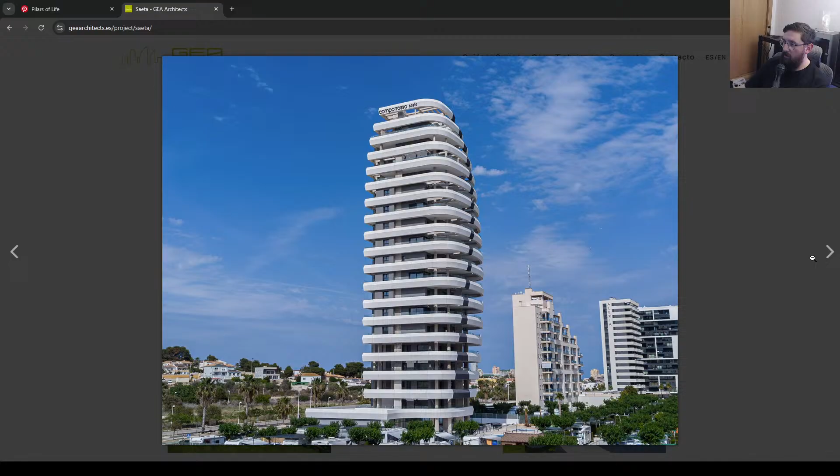So there's this firm I work for, right? This is the firm I work for. We recently did a few projects. We're finishing this one here. This is a project we called Saeta. These photos don't do it justice, but the logic behind this is quite parametric, although we didn't do it parametrically speaking. We did it via 3D modeling in Rhino.

So I actually have better images here, let me just open it up. I have it on my WhatsApp. This is on-site images. Yeah, a few pictures we took.

It's really nice, and I was thinking of grabbing this idea and taking it to Grasshopper and seeing how we can evolve it a little bit more, or play around with it. Oh, these are other buildings we're doing right now. We finished this tower here and we're doing the next one here, just out of curiosity. These two are also ours.

Anyway, yeah, I was thinking of taking this design and seeing how we can play around with it a little bit more. Let me just put it in my WhatsApp, don't want to expose much. You can see here it's done with GRC material, and there's this figure in the middle which is black instead of white, just to contrast and make it a little bit more interesting.

So yeah, I was thinking of grabbing this concept, and then instead of doing it with a square base with a fillet, perhaps doing it with a polygon or a circular sort of floor plan, and then playing around with the scale.

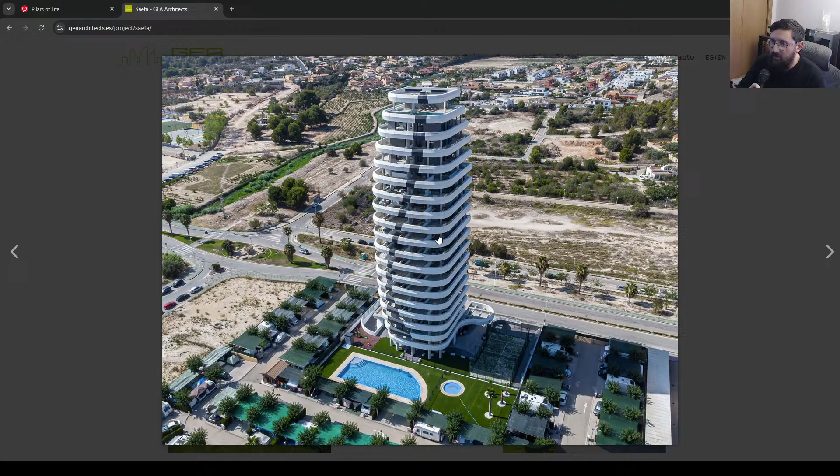So yeah, this is the firm I work at. My job is to design these buildings along with my team, the team I work with. We have a lot of projects actually, a year we probably handle around 60 to 70.

Oh, this one's beautiful as well, I really like this one. This was a competition we won, beautiful design. This is being constructed now, so these are just renders. Yeah, beautiful, we do a lot of projects, a lot, perhaps one a week, more or less.

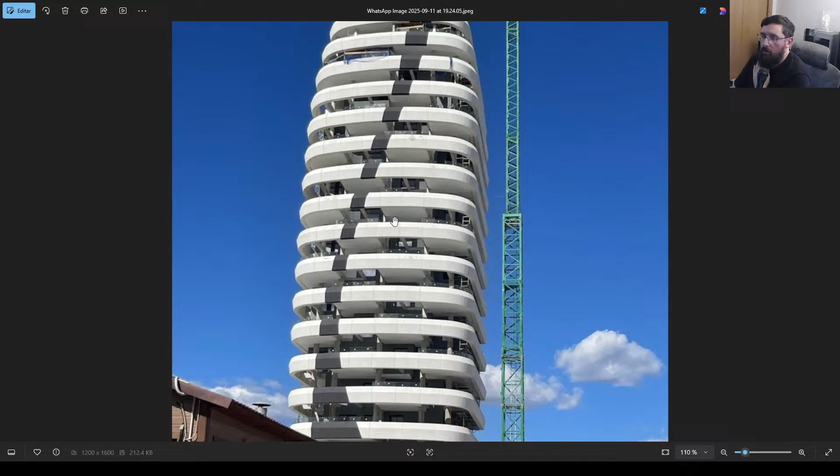Yeah, just a crazy amount. Anyway, so that was an idea I have, and then there's this as well. I know this looks super attractive, but I'm not a huge fan. I'm thinking of just doing the Saeta project, this one here. You can see here the terraces are like one yes, one no, one yes, one no, and that's because if you build a terrace on top of another, that counts as constructible surface, and then you have a limit of constructible surface per plot.

So doing it like this, it doesn't technically count because you have two heights instead of one, so this doesn't count as an overlapping surface. So it's kind of a trick to save or have more meters squared designated to the housing unit in the middle. So here there's two units, one on the left, one on the right, and then each one has a terrace. So it's going one yes, one no, yes, no, yes, no. And then we kind of worked it out that way.

Ingenious solutions, right? Design is important, even for constructive design. Anyway, so I'm thinking of doing that. Now, if there's no opposition to this idea, we can get into it and see how we can approach it. Again, we're not going to do exactly this, it would be a little bit different. But yeah, that's the idea.

So yeah, that was a little insight as to what we do in our office on a daily basis. I'm part of the design team, so that's fun. Okay, so let's work it out.

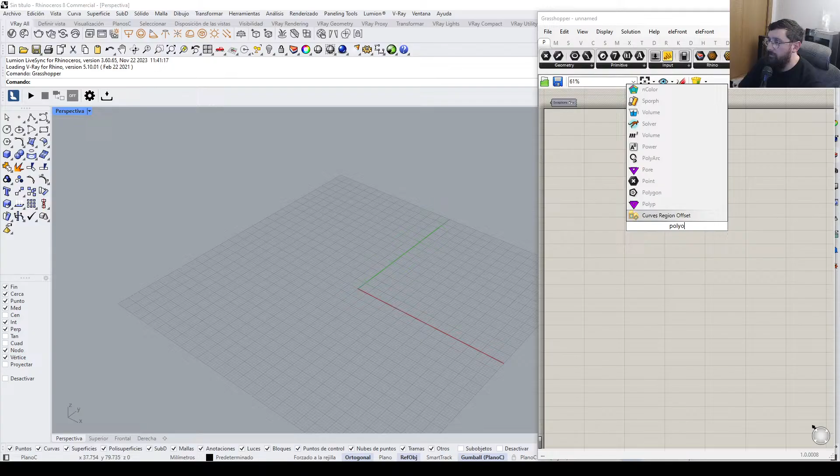I'm going to start off with a square. Let me just make some more space. XY plane.

Radius between 0 and 15, I'm going to start off with 10 maybe. Segments, I'm going to start off with a square base for now, so 4 sides. Oh, I just did something. There we go.

Here we're going to go for construct point, where are you? Here. I'm going to use a series for Z because I want multiple polygons along the Z axis. The height difference is going to be the height of a slab between slabs. I'm going to say 3.3, more or less. I think this project was 3.2 if I'm not wrong, just as a quick note.

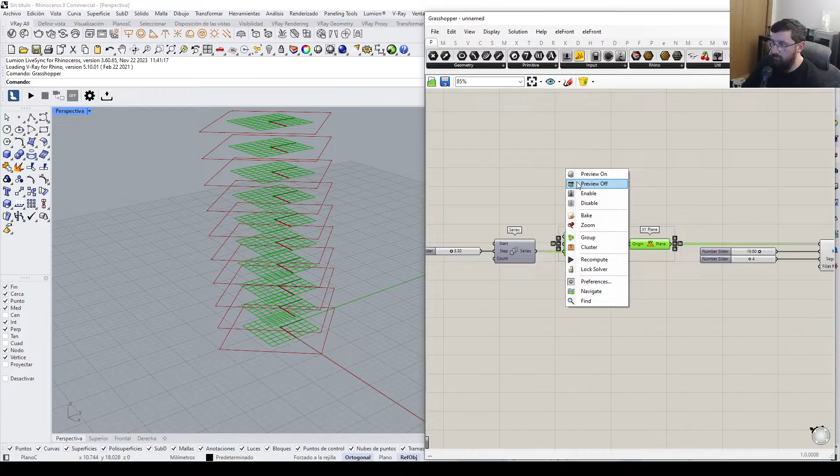Here on count, I'm going to go for... oh, I shouldn't have done decimals. Between 0 and 30, here I'm going to say 20. I think this one had 22 floors. No, I might be exaggerating, 1, 2, 3, 4, 5, 6, 7, 8, 9, 10. Yeah, about 15, 16 floors.

So this is the square. You know what, I think a circular one will probably be better. Okay, let's fillet it, I think it's going to be better.

So fillet radius, if I do maximum fillet it's gonna... oh, why is it not interpreting as a curve? What's happening here then? Parameter failed to collect data. Okay, so I'm using the wrong fillet, basically. That's not it again, it's this one here. There we go.

Okay, so here I'm using a fillet of 1. Okay, I'm gonna do here. Okay, so how can we achieve some sort of design in between? Doesn't necessarily have to be this, it could be something else.

So what I'm thinking is using evaluate curve. Does that make sense? Where I can extract a point on the curve. The only thing is, I need... actually no, before we do this, we need to create that belly, right?

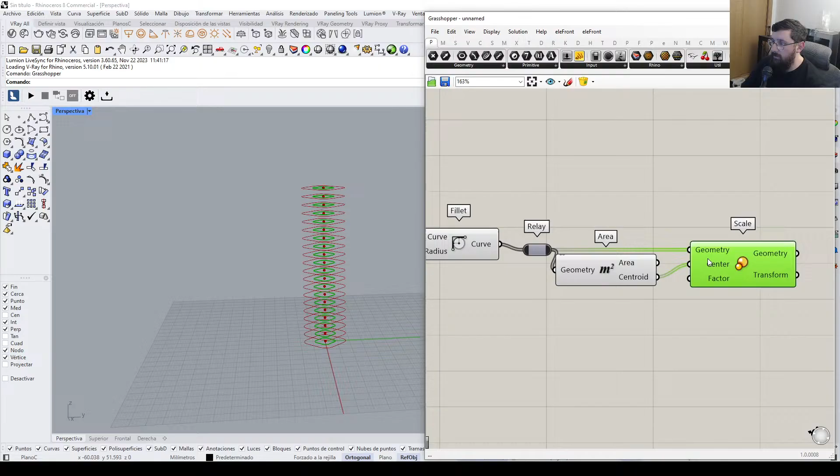So I'm going to scale each one from its center, and the factor is going to be according to a graph. I think it's just easier, graph mapper. The range is going to be the amount of copies of the fillet here.

Something's happening over here, the scale, I don't want to see that yet. The steps is going to be the same as the count minus 1, so x - 1. I don't want it to be variables, I want it to be the algebraic form of x. That's going to be my steps.

The graph is going to be like a belly, so I'm just going to go for a sine belly like this, and then here I'm going to use a remap. Bang. Like so, do bish bash bosh.

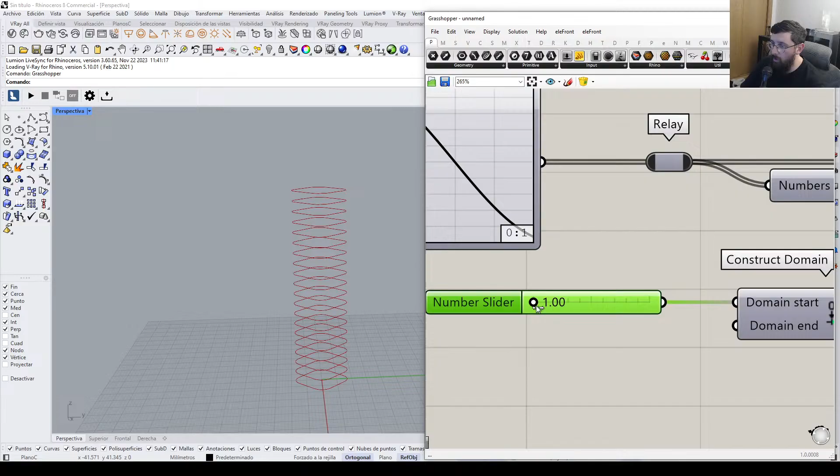Where do I want my domain to be from? Construct domain, between 1 and 2, because you don't want it to be too much bigger than it already is. So I want the domain to be quite close. 1 is exactly the same size, and then 2 is 1.5, it's pretty big. We'll just have to see how it works.

Factor, turn this back on and turn off the original ones. You can see we have something like that. So I think it's quite a lot, you want it to be somewhat subtle, and we have something like that. I think, okay, we can play around with these values later, I guess. So right now it's not a great, super complicated script.

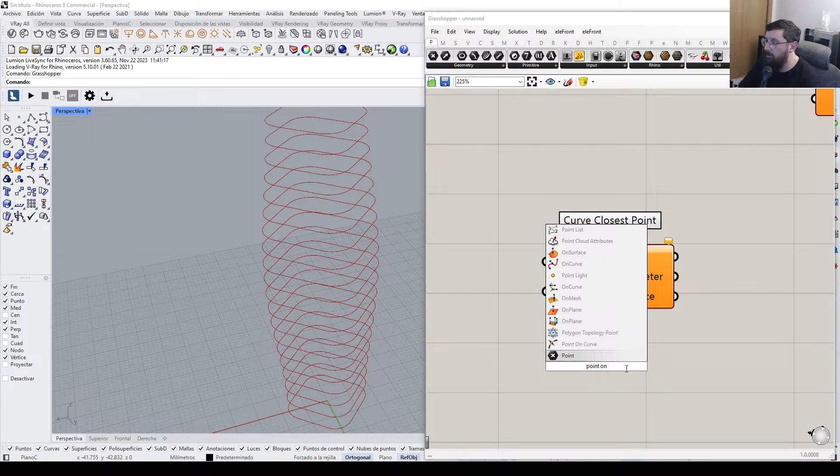What's that component? Curve is... it might be curve closest point. No, points on curve. Oh, you're joking. I knew this would happen.

So I actually searched, because I kind of reflect a lot on how to do things before I do it, so I have some sort of idea as to how to do it. Shit, I don't remember how to do it. I can pull this parameter. No, it's not that. Okay, basically I need a point to generate a point on the curve according to its percentage.

I don't know, I'm going to search here quickly on Google. Okay, I don't know, curve... I know there's a point on curve or something. Point. Bloody hell, what's the component? Is it? It might just be evaluate curve, where the parameter is the number.

Wait, in theory, could it be that the parameter is just a value between here? Because I've reparameterized, the parameter is now between 0 and 1. Is that the logic? Yes, I think it is.

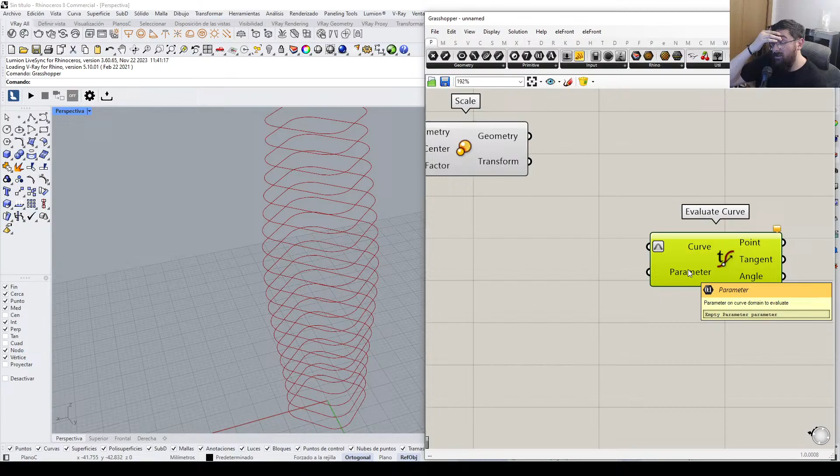So I think in theory what I can do is I can just copy this here. And instead of my parameter going between 1 and 1.3, I can say my minimum is going to be 0, and this is going to be 1. And I think 1 is going to be too big.

We'll see in a second. Yes, there we go, you can see it here. It's wrapping around the building, but I don't want it to wrap all the way around.

Oh shoot, is it stuck? Oh, I think it's because my minimum is 0. Okay.

So if I go here, my starting point is this corner here. Perhaps I don't want it to be on that corner, I want it here more or less. There we go, so you can see we kind of follow that curvature there. So that's going to be our end point actually.

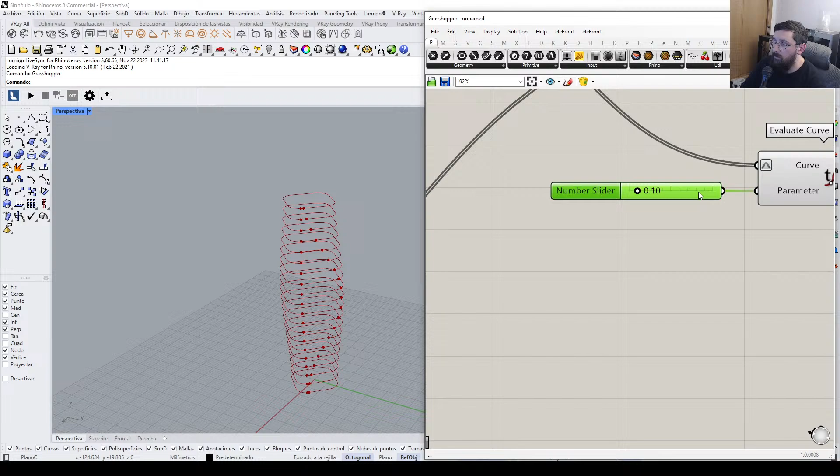And then we need to generate another one. Well, I'm just going to copy and paste this actually, and the parameter here is going to be like a starting point of 0.1. So you can see here it's quite close to one another.

So I'm just going to quickly change this to 0.3 perhaps. No, that's too much, 0.2. That's still too much, 0.15. And I think that's okay. And the maximum here is going to be 0.25. We want it to be somewhat slim.

And then use shatter. Exactly, that's exactly what I had in mind. Nice, I can feel like you guys are understanding the vibe.

So I guess here I would have to use a merge, and then here shatter. These are right, I have to use the parameter. Shoot, how can I generate the parameter?

You're joking. I can use a parameter... I can use a curve closest point, that's going to generate the parameter for me. So if I connect the point here, the curve which we already have from before, which is this, then we have the parameter. Again, I'm just going to copy and paste this.

Bang. Curve here, and then merge. Parameter, shatter. In theory, I'm hoping this works.

And the curve is what? I can just use the same one. I can just do this. Bang, bring this up.

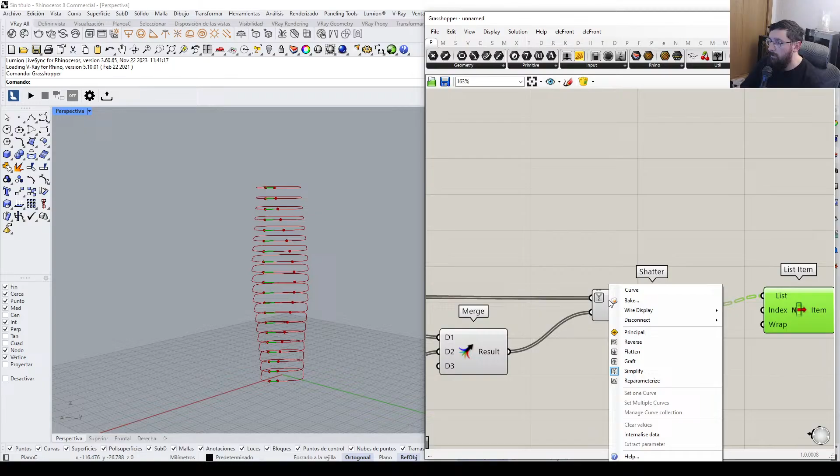Graft. Maybe the merge isn't working properly. There we go.

You can see we now select the first and the second. So I'm just going to quickly copy paste this panel, and the other one is going to be here. So I can select either one like so, right? So we have something like this.

I'm thinking perhaps I should probably clean this up a little bit. Bring this over here, this I can just connect to here. Let's try and be neat. I always say the same and then end up doing complete spaghetti.

Okay, alright, we have something like this. I have both curves, the one in the inside, which is currently highlighted in green, and the exterior.

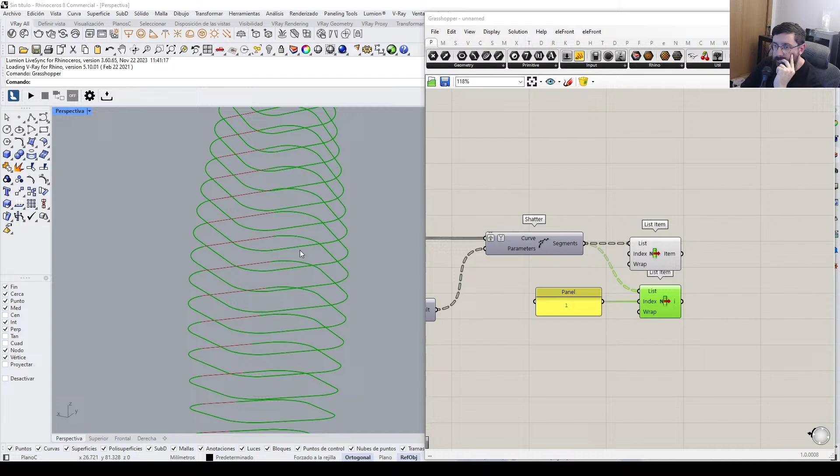Okay, so we want it to have some sort of balcony offset thing going on, right? So how can we do this? Do you want it to have the same effect as before? It might be a good idea to do so.

So first thing I'm going to do is I'm going to kind of design what the floor plan is going to be, just generically speaking. Offset curve, I'm going to go inwards. Balcony is going to be, let's say, 3. That's going to be my curve, it's going to be something like that.

And then perhaps instead of going here, I can do it here, and then I can just do a fillet with a different value.

There we go. A bit less, perhaps just 2 or even 1.5.

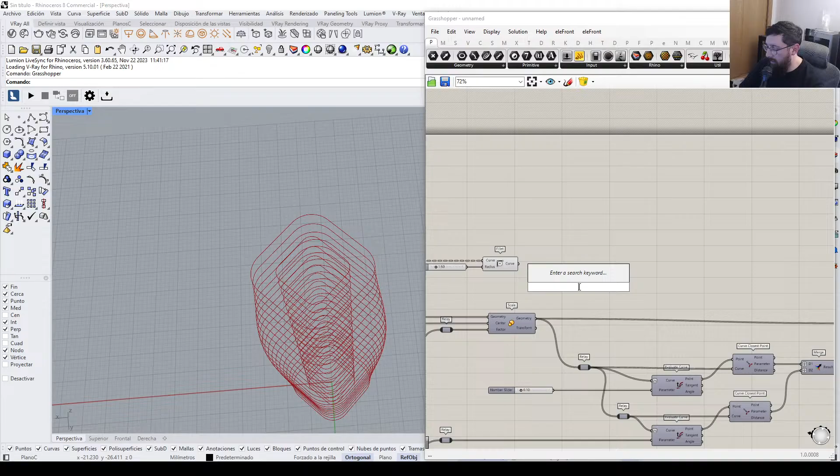And then here, what should we do here? This is the scaled one, right? So probably best if I put this next to my scaled version. And then here, a solid difference between the big one and the small one.

Oh okay, I need to graft and save my document. Give me a sec. Saving document. Okay, saved. There we have our balconies.

And then we wanted to achieve that kind of crisscross. The thing is, I'm not certain it's going to work 100%, but it's worth a try at least. So what I'm going to do, this has 4 sides, I can divide by 1, 2, 3 per side.

Thing is, I can define the polygon here. Expression x times 2. I need to double check this in a second, but I feel like this makes sense. If not, I can change it afterwards. X times 2 here, this curve here.

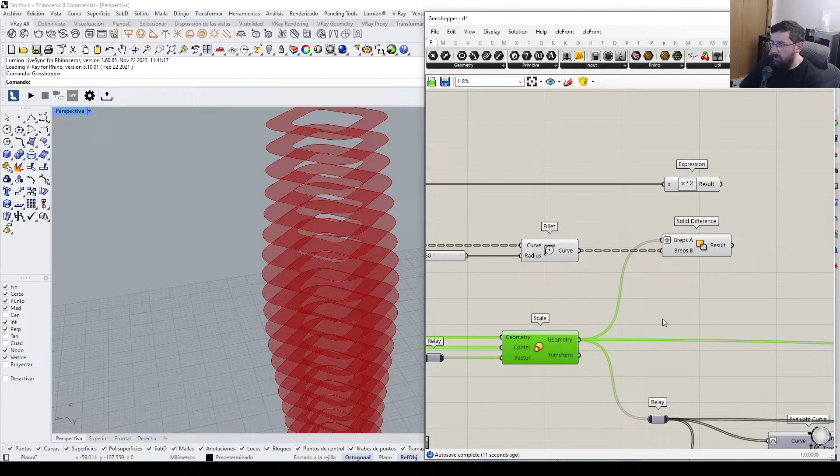Now I need the other one, which is this one here. I can divide curve, count, curve. Ah, shoot. It's not considering them all as a joined curve. Why? Why? Here it is, here it is not. Or is it? Oh, it is, because it's curved, so it doesn't give you that sense.

Okay, so here I guess I can go for 3. And then we can check. Yes, okay, 2, 3. Thing is, the third one here doesn't make much sense. I'm not sure how we did it here. We did the whole corner, that's why. Here it's a little bit different because we want it to be on polygons.

Different approach, I guess. I'm not sure if this part's going to work, to be honest. I'm not too confident. From here to here, we get all of these. Okay, good.

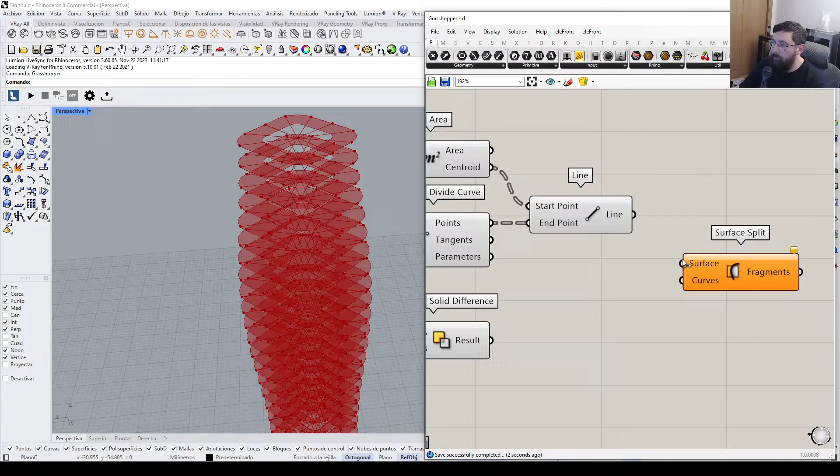Then surface split, where I'm going to be grafting. I should save this by this. I should probably graft. No, graft is not going to work. I think this works, let me check. Let me bake. Yes, okay, so that does work.

Okay, good. What happens if I dispatch? Because I have multiplied by 3 and it has multiple sides, it's an even number, so I think it should be okay. Bang. And then if I turn this off, we get that.

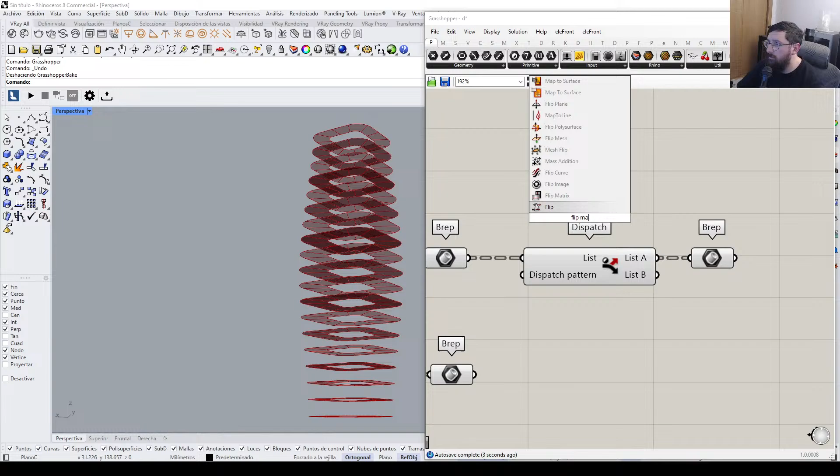Okay, so what I'm thinking is I should probably flip matrix. Bang, yes. So here I have to do like a double dispatch, I think, where I have this, and then another dispatch without flipping. I think I might have to flip because I have to revert the flip, I think. Yeah, I think I have to revert it. Okay, let me check. Bang. Yes.

Okay, that's going to be this one. And then this one here. Turn this off, and instead of here, it goes here. So you now get that zigzag where the thing I explained earlier works.

Right, so for those who've just arrived, we were talking about this building. When we designed this building in the office, we do this a lot actually. This happens a lot in Spain, because on the plot where we build, you can't build on 100% of the floor, and you want to go high up. You basically want to conserve how many meters squared you can build. So that's why it's usually thinner, because then you can go higher, and the higher the apartment, the more you can sell it for, and a high rise is much more attractive than a lower building.

What happens is you get a certain amount of meter squared usage you're allowed to build, and if you have a balcony directly on top of another, like from here to here, that counts as buildable meter squared, so you're consuming your meter squared for a terrace. Whereas if you have it at double height, it doesn't compute. So what you do is have it at double height, but you're always kind of doing this zigzag, so it doesn't compute, but you're kind of being clever, using that disadvantage of meters squared to design your building in a different way. So here it's very attractive that you have this double height, but it's not an attractive motive as to why we designed it like this, but rather a technical way around the buildability of the meters squared, if that makes sense.

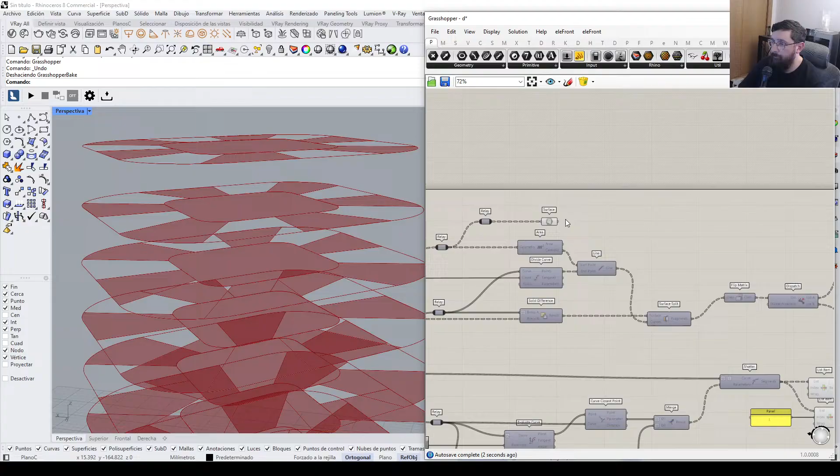So that's sort of what I'm looking for here in this part. So we have that kind of terrace going on here, and then where are you? I'm looking for the inward one, which I'm just going to convert into a surface like so, and then we can drag this over here, and that's going to be sort of the buildable space.

No, it's going to look better. Okay, so we have that floor plan. I'm just going to reduce it a little bit, actually. 12, there we go. We have that floor plan like so. What I'm going to do is define the building and the interior first.

I'm going to extract the surface. No, not the surface, the curve. I'm going to save.

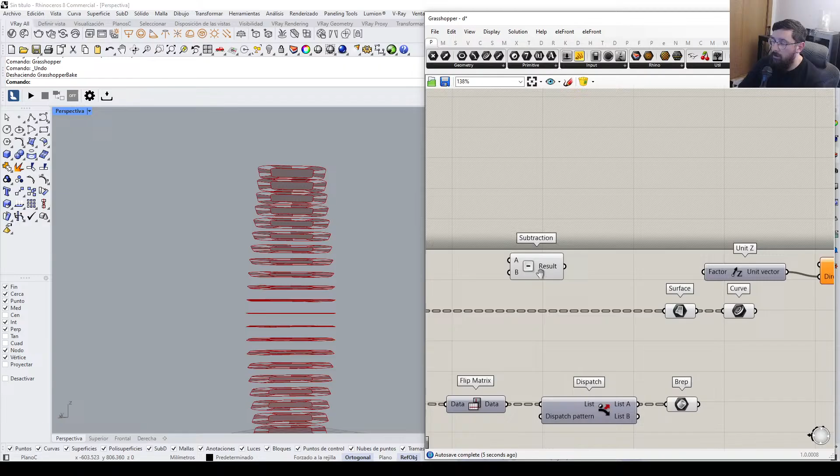I'm going to extrude. Now the height of the extrusion is going to be the subtraction of the height of the building by the thickness of the slab. So I'm going to say the slab has a thickness of 30 centimeters, and the height difference is something we defined at the beginning with this value here, height between slabs. So this is something we need to consider over here.

Yeah, okay, I'm just quickly going to relay this over here. This is Z here, this goes here. Actually, it should probably connect to the surface. No, not the surface, because you want the extrusion to be a surface, not a solid. Okay, you can see it's a surface, polysurface to be more precise.

And I guess we can just panel this. Normal panel, where is it? Square? Rectangle? Is it called rectangle panel? No, square panel? Ah, quad panel, Jesus.

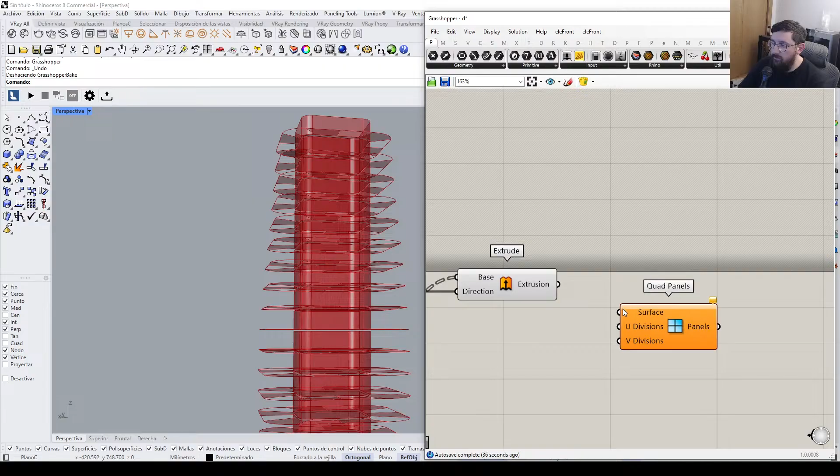I want one of the sides to be 1 and the other one going to be whatever. Now we can be super technical about it in a minute.

I'm going to deconstruct brep. I should probably calculate the length. So if I calculate the length of the edges, I can say expression, the length divided by whatever size I want the frame to be. So I'm going to say I want the frame to be 2 meters, and it's going to be x divided by y. That's going to be the division in one of these directions, which I'm not sure which one it is, but we will definitely find out in a second.

Faces, there we go. Turn this off. Let me move all of this down. Let me turn this off.

Okay, so I have the one in the correct direction, whereas this one is flipped. That's annoying. Let me just quickly sort this out. Like so, I don't need this. Okay, yeah, it's not an issue. I'm not going to be too bothered about this.

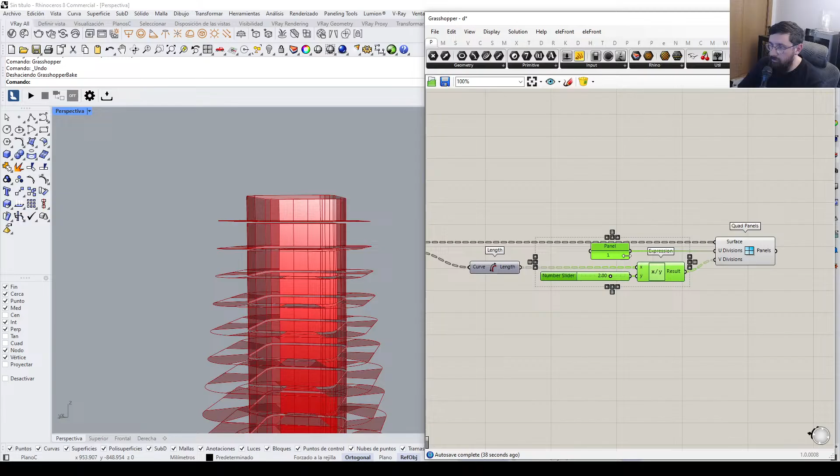I'm going to go for a frame. Actually, no, evaluate surface, area. Bang, bang, bang, turn this off.

Frame, I'm going to offset curve, negative, frame, oh wrong one, plane here, negative, I'm going to say 0.05, turn this here, hopefully it doesn't explode.

I should probably graft, I feel like there's a grafting issue here. Let me just double check. Here. Yes, I have duplicates for some reason. Okay, let me turn this off. Make sure this is grafted. Simplified and simplified.

Oh, this is a reparameterize, I don't know why I did that. Simplify, I'm going to simplify here as well just to make sure, and enable. And in theory, bake this.

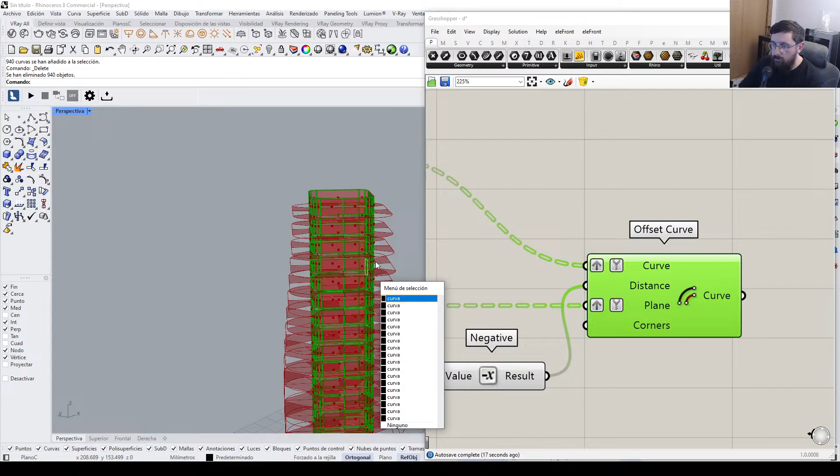Oh, that's not bueno. That's not bueno at all. What's happened here then? Panels, chord, no. I'm offsetting it inwards, it should work. Frame.

Is it because something's happening here? I might be duplicating surfaces. Yeah, okay, that's the issue.

Okay, let me turn this off. Graft, simplify, turn this back on. And I should have it sorted. Yes, now it's all nice.

Okay, so here now I have this good. It's all offsetting inwards good. And then I can do a solid difference between, let me just graft and flatten, graft and simplify rather.

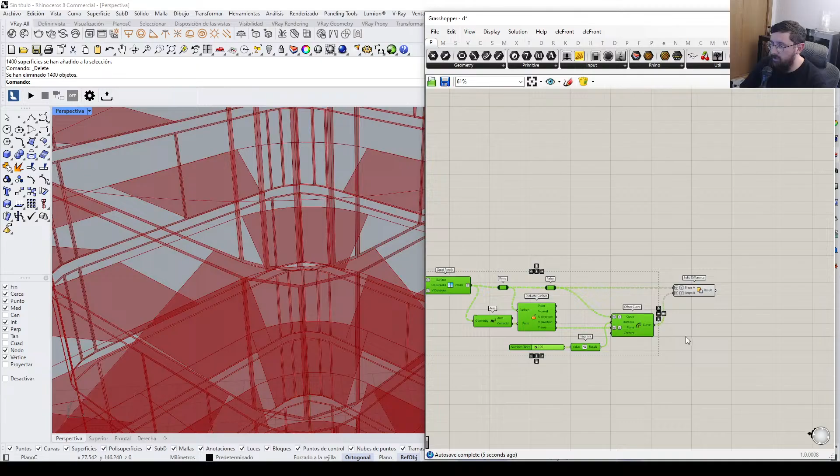Simplify, let's do that here. Bring this over here. Ah, okay, it did work. Okay, I thought I did it the wrong way around. Surface. So I have the frame and the windows.

I'm just going to change the color so I can preview it a little bit better. This is going to be the frame. Frame is this. Here, let me copy and paste. This is going to be my window. So this is going to be blue or green, whatever.

Okay, that's going to be my window, that's my frame. And the distance is pretty big, so I'm going to go for 1.2.

Going to take a second to load. Evidently, I'm creating more polygons. Oh, I don't like this. What's happening here then?

Extrusion, graft. Is it because it's considering I have more edges than faces? Is that what's happening?

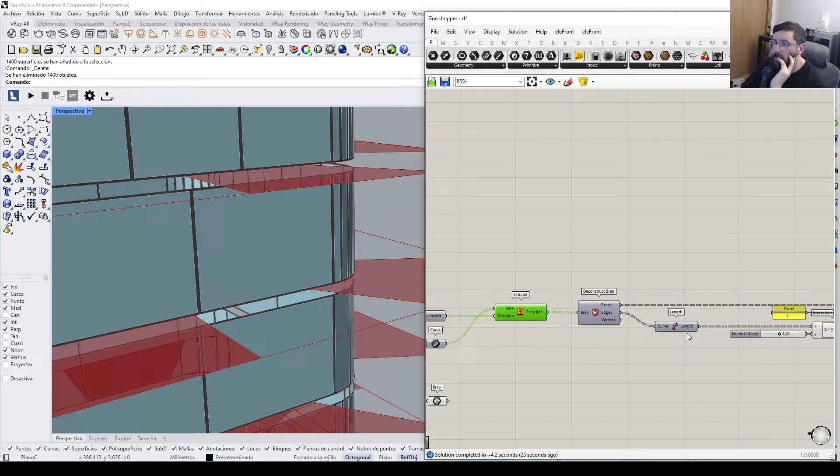There is a way you can test this. I can just do this. Face, edges. Maybe, we'll find out. Oh, it's overthinking. Damn.

Uh-oh. Not looking good. Not looking good. Oh. Not looking good. Load. Ooh, that was risky. That was very risky. Is it because I'm extruding a ton of loads of things here?

Here I'm extruding by this value. No, it's a fixed value. I don't know. Faces. Okay, let me just double check something. List item. No, list length.

Of this flatten panel, 600, 200. Yes, it is as I thought. Okay, so extrusion, I mean, this should be 600 as well. And it's not working. Why?

Is it because I get a lot of values here? 600. They should match. Why does it not calculate properly? Is it because I get an invalid value here?

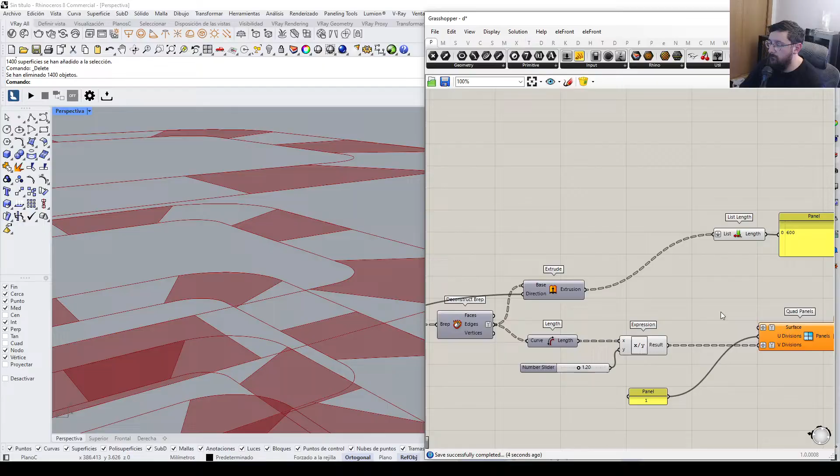It should work. I'm confused. Should I try it one more time? Just see. Yeah, I think I should, because I'm not sure why it's not working.

Actually, I'm going to reduce the number of heights I have. I'm going to make it really small, just to favor the calculations a little bit more. Suspicious. Now it works, okay.

This doesn't work. Curve offset failed. Is it because it's not planar? Yeah, I thought so. Okay, there is a workaround around this, and I think it's going to be a little bit easier, to be quite frank.

So the way to do it would be to shatter. No, not shatter, sorry, divide curve by this amount. Flatten, simplify, simplify. I'm kind of getting into secondary stuff here, but I think it might be useful.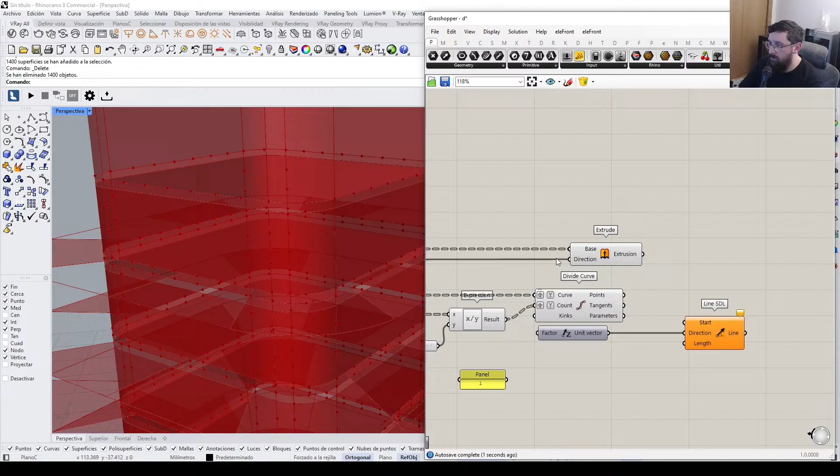And then here I can do SDL, Z, the extrusion value, starting point, and then surface split. Actually, no, that's silly, I can do a much better thing.

Polyline, close, yes indeed. Wait a second, what's happening here? Edge. What's happening? Wait, I'm going to do this part again because it's just not fun.

Okay, so the idea is to divide curve, divide length, I think is going to be more appropriate. Divide length, distance is going to be whatever, I'm going to say 2 for now. I do want it to round up, so I'm going to round up.

This is my curve, there we have the distances. Then SDL direction Z, starting point is this, this is length. Then here I'm going to loft between each group. Not sure why it's not working.

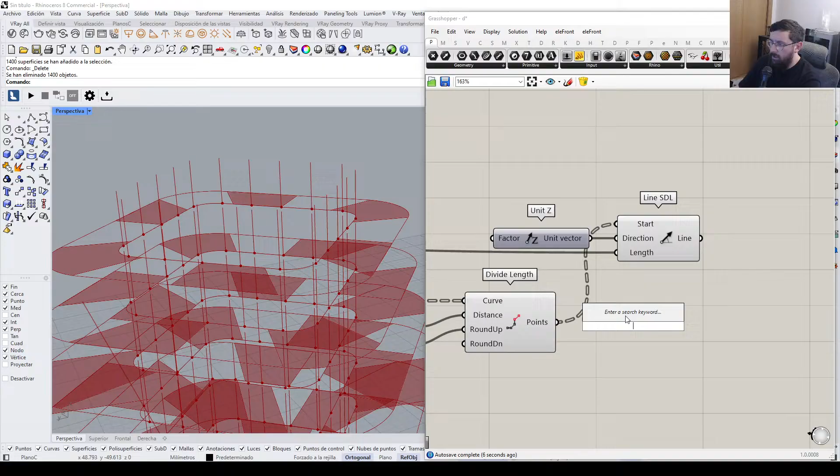No? Okay. Actually, wait, polyline, I can do it here at the bottom. Yeah, there we go, closed, invert. That way I can just extrude, less components, Z.

Bang. Then we have it flat. Yes, now we can do the evaluate surface, much better. Evaluate surface, area.

Surface, why is it not considering it a flat surface? I don't understand. No comprendo, no comprender.

Anyway, workarounds. Quickly do this over here, move this up here. I need an offset curve, negative, plane. 0. Oh, this didn't work.

0.05. Curve is this, turn this off. Solid difference, I'm going to save between the big one, small one. Didn't work. Why is it not being friendly today?

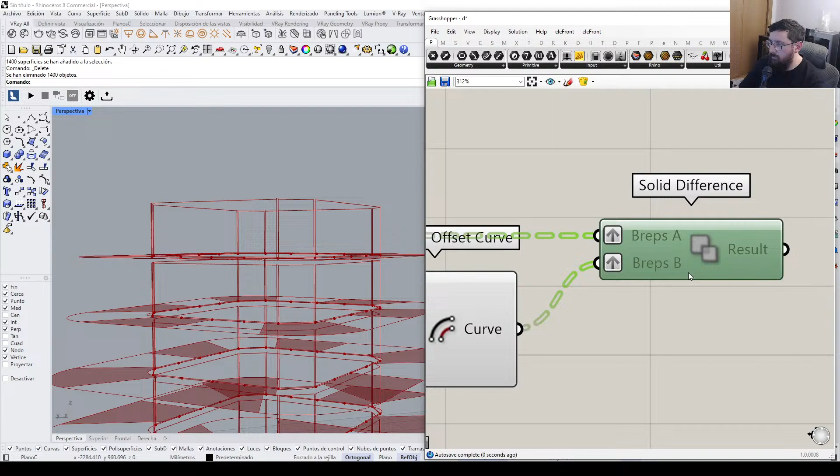Simplify. No, that's strange. Plane distance curve. Clean tree. Bang, bang, I don't understand why. Toggle. Yeah, that's strange, why doesn't it work?

Do I have duplicate lines perhaps? Cull duplicate lines? No, I don't. Okay, that's interesting. Yeah, I don't know, to be honest, I have no idea. I ain't got a Scooby.

I ain't got a Scooby-Doo. Deconstruct, I'm not going to detain. I'm not going to stay here forever, so I'm just going to quickly do this. Can't be bothered. I'm going to do one final different method, and then I can't be bothered.

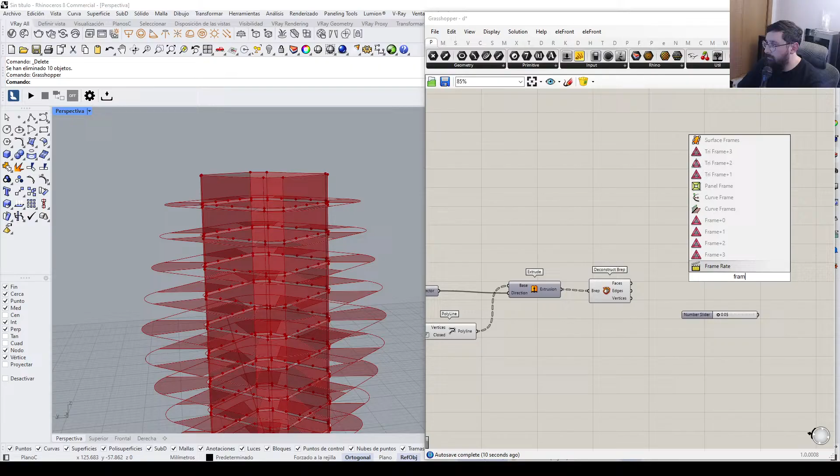I can do frame directly. It's not perfect, it's not my favorite way of doing it because it's not really that precise, but it is a workaround that serves the purpose of the design. So I'm not going to stress too much.

So here, Brep, put that there, copy paste, put this over here. Same thing as before, custom preview. Swatch to change the color of the preview. This is the frame, so I'm going to go for black.

Copy paste for the window, I'm going to change this to blue. Blue over here. Okie dokie, turn this off. The frame is too big.

0.95, sure. Oh, I didn't divide it. Explode? I didn't explode, I did not explode. That's why it didn't work before. Oh, that's so bloody annoying. Anyway, doesn't matter, not gonna spend more time on this. I'll scratch that itch later.

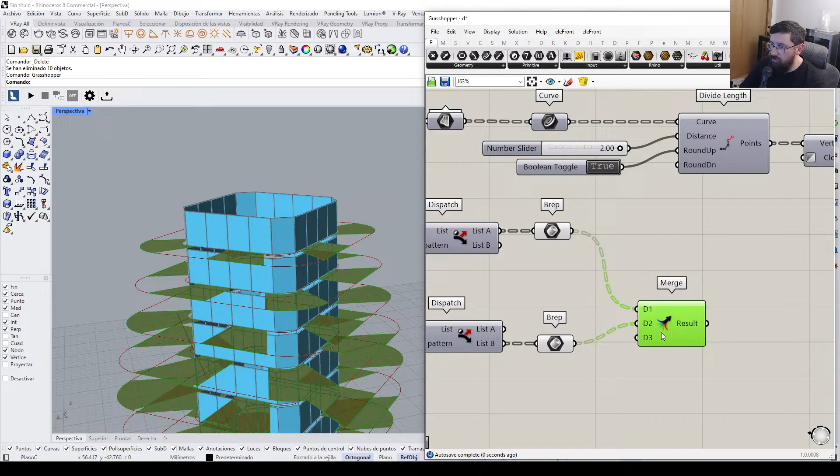Okay, so we have the floor plan. Now for the balconies, I'm gonna merge these two groups together. Merge. There is something I'm not sure if it's gonna work. I'm just gonna quickly test the idea I have in mind.

That's one. No, it doesn't grab the same edge. Ah, bollocks. Ha ha ha ha ha. That's annoying. That's annoying AF.

I guess you could probably sort by distance to the center, and then cull the closest one. That's an interesting tactic. I'm not sure how that's going to work though, to the center of each floor. No, this is too tricky. This is too tricky.

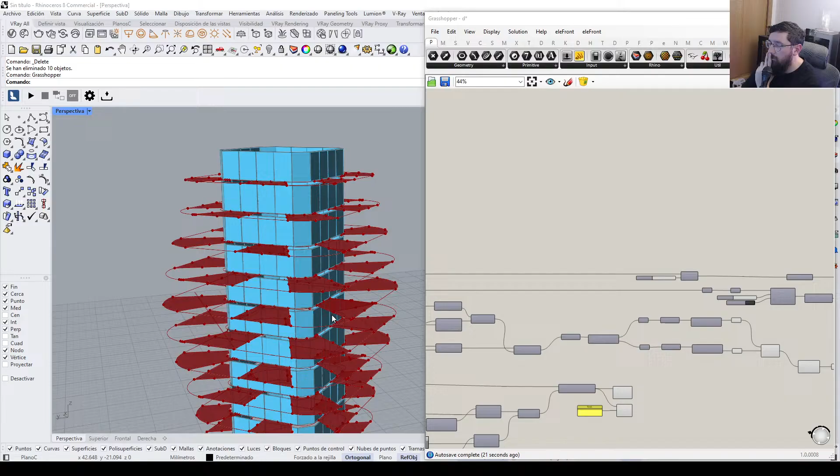Maybe to 0,0,0. This is my curve. Okay, I reckon maybe I can use the same subgroup. I'm not sure if this is going to work. Let's give it a try.

Middle, sort by distance. Sort list distance between the centroid and the middle point. Keys and the values are my edges. And if I list item my values, oh, it did work. So I guess I can just do this.

Cull index, and the value is 0. Haha, oh. Geometry. Okay, that's cool. Join curves. Oh, wrong one.

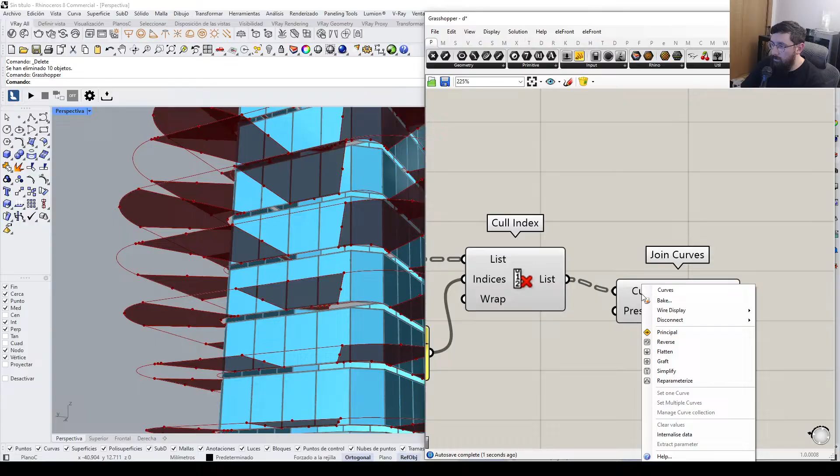If I join curves, I'm just going to double check if it works. Indeed it does. Grasshopper. Save this quickly. Save document. Here we go. Okay.

I'm just going to extrude. I can offset inwards, that's also another option. Yeah, I think if I can offset inwards. Offset curve. Distance, negative.

I like giving them a thickness because if you take this into, for example, 3ds Max, and render a surface as glass, it's not going to look great. So I always give it a thickness for the renders. I'm taking this sort of idea into account.

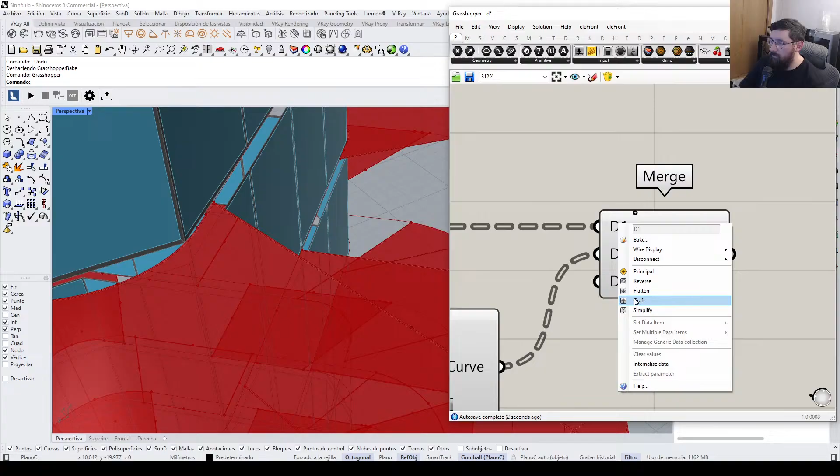And then here, merge, and I'm just going to loft them together and then extrude. Graft, oh wrong one. Graft, graft, simplify, simplify, loft, extrude. What height should my railing have?

I'm going to go for 1.2, more or less, like so, like so, and we have this going on. Okay good, this is good.

Okay, I'm also going to give this a color. This is going to be light blue.

Okay, then we have the slabs, which is this. I'm going to extrude negatively. No, where are you? Extrude Z, Z negative. I think we have negative here. No, I haven't, negative. And this is going to be this value here.

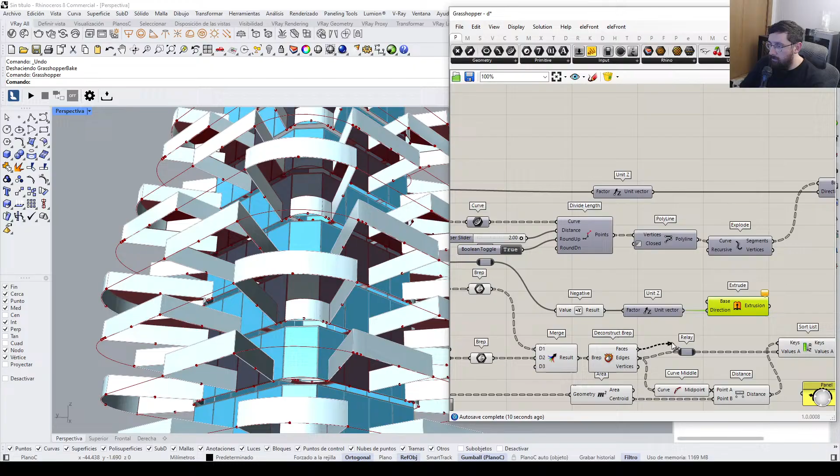I can use this. Okay, drag this to the end. That's the slab, that's that slab.

And we can do the same for, where are you, for this. I can convert this into a surface. I have it over here. Okay, it's good, it's very good.

Merge this bad boy, and this, and this. Haha.

Okay, so we have the slabs, we have the terraces. Now we're going to go for the external design. It doesn't look great now, but when we play around with the results, it's going to look better.

Now this script is a little bit longer than anticipated, but I think the results might be interesting. And if not, we're learning. Or at least I am.

Okay, the external part, which is two design parts, right? So it's this and this. Okay, so what I'm going to do, I'm going to turn all of this off for now. Turn this off. I'm left with this part and the bigger part. Okay, so what's the plan here?

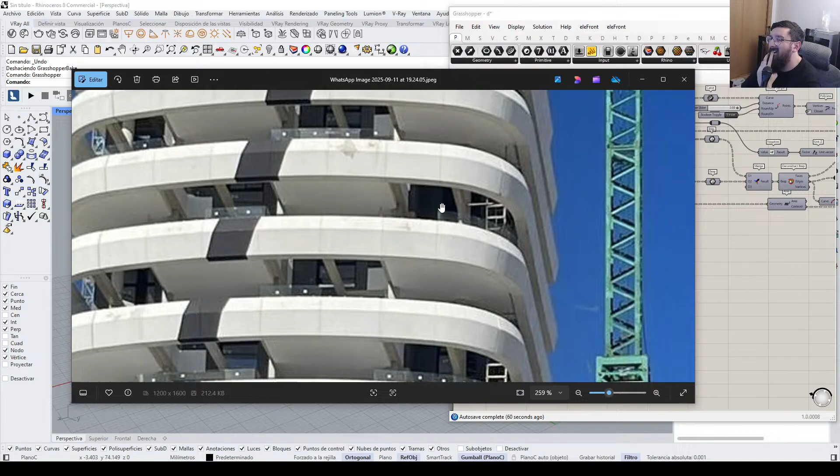Offsetting in one direction, depends on what profile we want, right? If we want this profile here, it's like 1, 2, 3, 4, 5 design parts. Interesting. We can do 5 parts, I guess, it's just going to be a little bit tedious.

So what I'm thinking is that we need some space. 5 curves, Jesus, all right. How can we do this? Okay, offset, offset, middle offset.

Middle offset. Okay, so there's 5 distances. 5 distances, okay, that's going to be a bit tricky. Okay, so let me just... we can work with one for now, which is going to be this one.

Need space, okay, I'm going to offset curve. Distance unknown, I'm going to say 0.5. Right, so that's one curve, 1, 2. Here, 1, 2, and then we need another one that's going to go down, 1, 2.

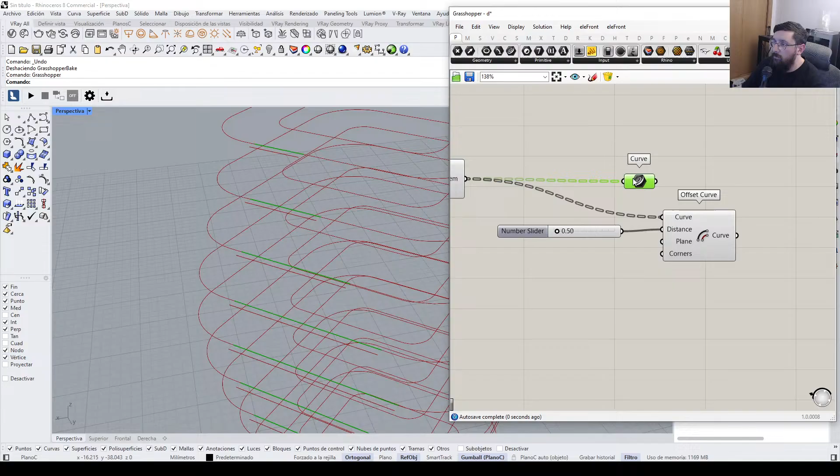Move in the Z direction negatively, whatever value we want. We can say 1 meter. Don't know, this is going to be tricky, eh? It's going to be tricky.

And the next one is going to be half this size, so x divided by 2. X divided by 2, bang. No, because... no, yeah, that's correct. So it's 1, 2, 3.

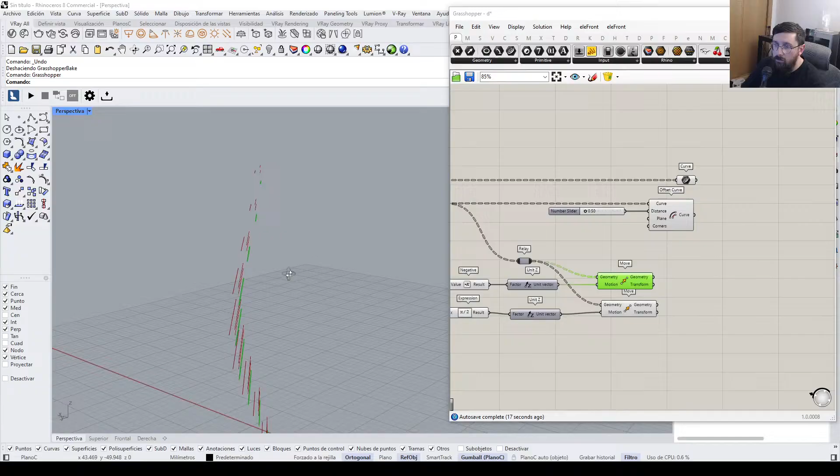Currently I have... let me just turn off the other one. There you go, let me just turn everything else off. Okay, we're back, turn this on. Okay, so I have 1, 2, which is the offset. One that goes down, and the other one that goes halfway down. Ah, negative.

Negative 1, 2, 3, and now I need... okay, the offset's wrong, this has to be smaller. Not too small though, 0.2.

The same offset is needed at the bottom. So that's not the bottom, this is here. And then here, this one needs to be offsetted by a bigger value essentially. Not completely bigger, so I'm just going to use an addition.

Addition between this and another value. This is going to be 0.5, copy paste distance. And this one's going to be to the middle.

Okay, so... whoa, okay, this is going to be tricky. Let me just quickly sort this out. 1, 2, 3, no this is 4. 3 is the middle one, which is this one.

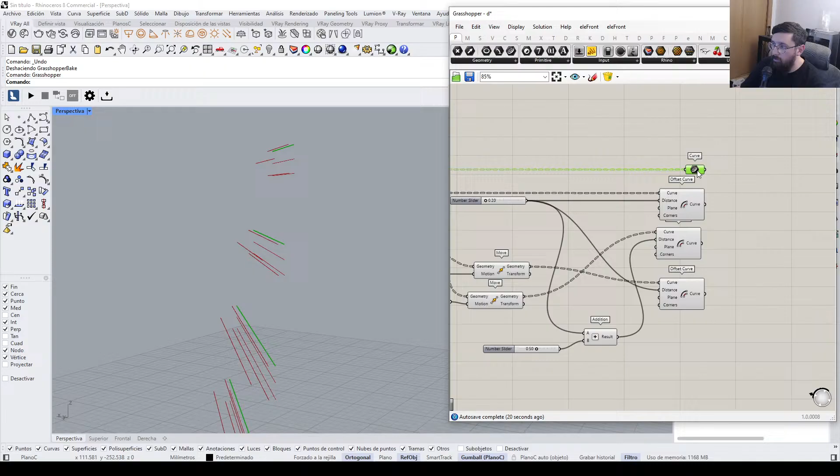Okay, so I'm going to quickly place them in order. 1, 2, 3, 4, and then 5 is this one here. Curve, recycle this component here. Okay, I think we have it, 5 curves.

Merge. And for this to be a little bit smoother, actually no, I could probably just do it like this, and then I can change the loft values. Oh, this is a bit of a crazy script, to be honest.

Graft, graft, graft, graft, graft. Simplify, simplify, simplify. Loft and pray.

Let's save this before anything. Loft, there we go, and then loft options. Multiple things, I do want it to be closed.

Do I want to adjust it? Probably, no, not rebuild, refit. No, I need the type. I think the type we're looking for is type 3. There we go, ha, and then cap.

Okay, okay, there we go. Then we have that part. And now we have to do the same for the other one. So the good thing is that we have the same parameters here.

So what I'm going to do is try and locate all of my numerical parameters and put them all together so that I can just copy and use the same one again, to share the same numerical values, right? So what I'm going to do is quickly adjust all of this.

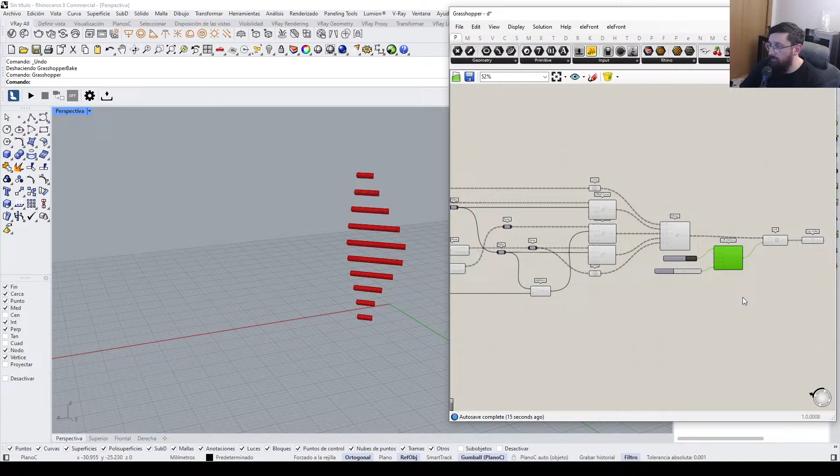I can use the same values for this, so I'm going to recycle this. So this, all of this, and then I can just, yeah, I can essentially copy and paste. And then the value here is going to be this one here.

And there we go. And then custom preview, change the swatch. There we go.

So we have that going on, and we have the profile nice and clean, right? So what I'm going to quickly do is add the floors we had before, 25. Like so, and then turn this on, and we have that thing going on there.

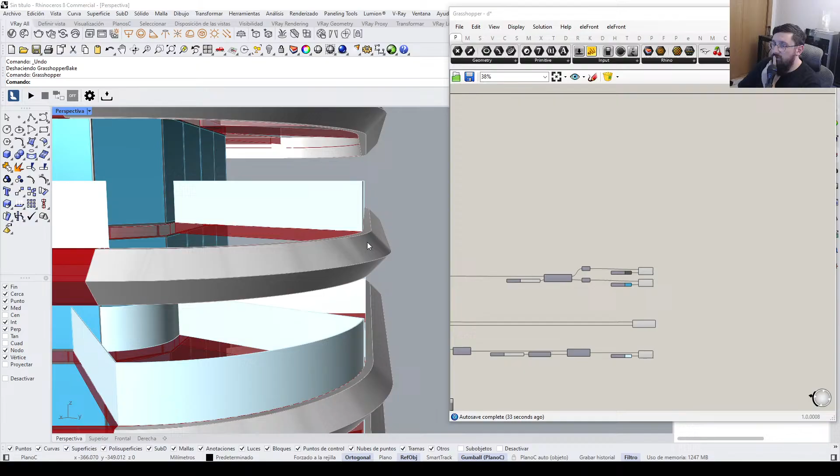And then perhaps it should go upwards, not downwards. That's annoying. I mean, it could go upwards. That's annoying.

Here I can even recycle this. Okay, bear with me one second. I'm just going to try and be as clever as possible here. I can recycle this here.

Copy paste, panel. Oh shit, what was the value here? Was it 1? I think it might have been 1. Yeah. And then here I can change this.

So the idea is that instead of going negative, I can go positive. And same here. And the middle point is the issue, right? Here it's not an, is it an addition? It's offset x divided by 2.

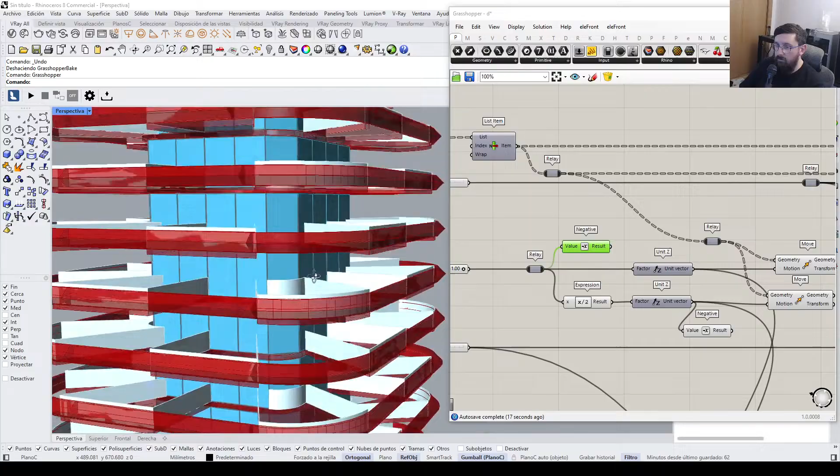Yeah, it's working, it's working. Okay, good. Custom preview. There we go, change the color to whatever we want. Turn this off.

And then I'm also going to use a custom preview here for the other one, which is going to be black.

And then perhaps we want it to have more height, so let me just get rid of this negative times divided by 2. Yeah, I think this is the height we said, we can make it 4. I'm going to say 1.5.

And then we get a more robust design to our building. And then perhaps the offset here is too much, so instead of 3, we can go for 2. There we go.

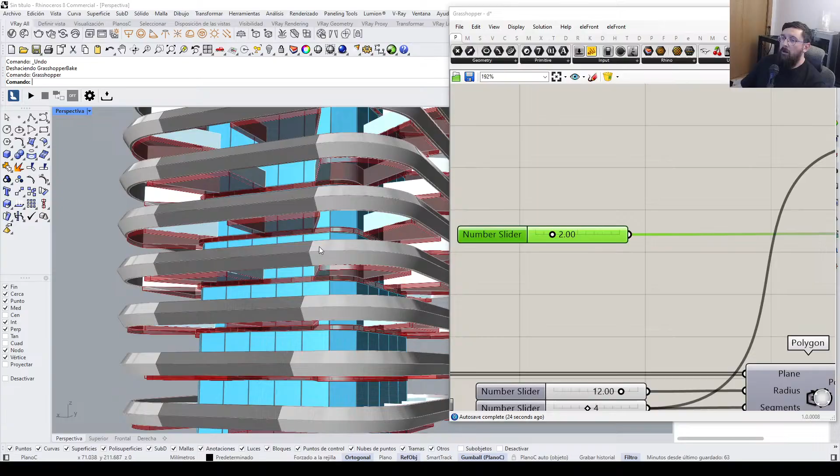Okay, yeah, not bad, not bad at all, mate. And then if we want to be even cooler with this, we can say that between 0 and let's say 0.5, and you can see it's going to go around the building. Like so. Or perhaps we want it to go all the way around, or almost all the way around, we can start doing things like this.

Or if I quickly disable this, I can do this. Enable, might take a second to load. There we go, and we start getting different patterns.

Like if I change the color of this drastically, and I change it to red, you can see the pattern kind of evolving. So yeah, it's just design wise, this is a quick way to do it, to come up with a nice neat design.

And then this is interesting, this hard shoulder might be interesting. And I'm just thinking that here, yeah, I mean, the domain start could be anywhere, kind of.

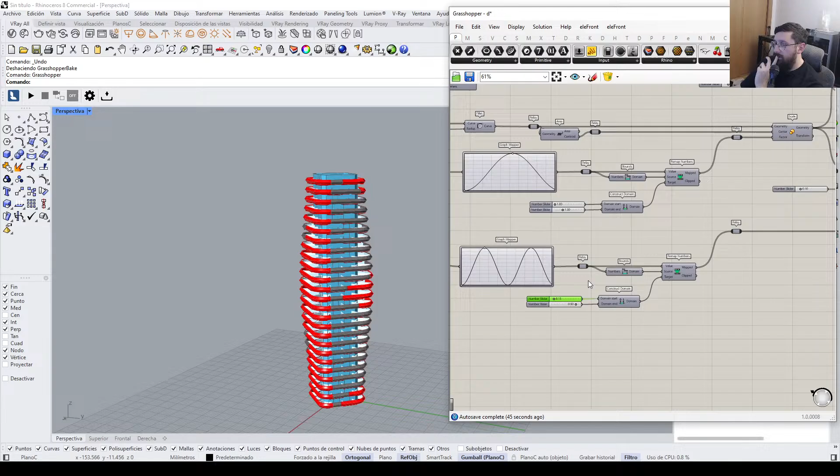Yeah, like if I say 0, no, that might be too excessive. 0.25, it's not that one. I'm looking at the wrong one. It's this one here, so I'm going to put it next to it so I don't mistake it. If I change this to 0, there we go - it's going to start off there. Or we can do another wave on this side, right? So perhaps we can copy and paste this.

And then this can be perhaps negative, negative and 0 to 0.2 - that means here this would have to be shorter. And then this can go here, like so, there we go. The starting point, I guess, would make more sense to be further away. I don't know, these are the sort of things we can play around with as much as we want.

Would you use a wave in the massing? What do you mean? I'm not 100% sure I know what you mean.

0.2, I think that I'm doing something wrong here. I'm not sure what it is. Am I reparameterizing here? What's happening here? Parameter outside of the curve domain. Why? 0, 0.2... negative - oh, because it's in the negative. I guess the alternative would be 2.

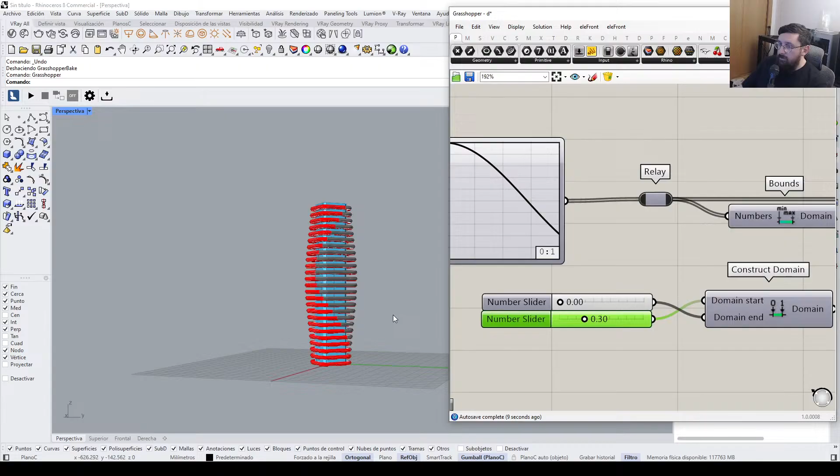Okay, I can do it the other way around, and then do that. Ooh, that's interesting, that's very interesting. If I do that, and then here, do that. I don't know, it just kind of depends on what you're looking for.

For the massing, the graph mapper is a single section of the sine wave. Ooh, I'm still not sure what you mean. For the massing, like the graph mapper is a single section of the sine wave. Would I use one wave? Is that essentially the question?

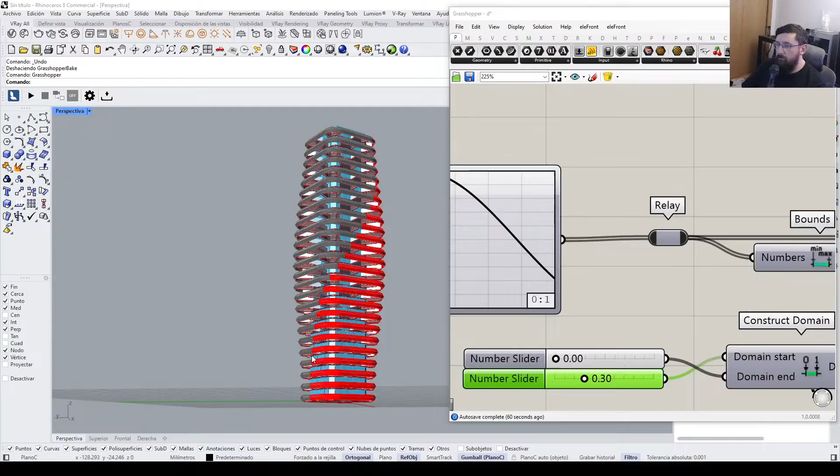Yeah, I think this one here is... I'm just going to keep this quite minimal. I personally would just use one wave, but evidently when you're looking at the building from multiple points of view, you would kind of want to see multiple waves. So it just kind of depends on the complexity of the design. I personally would just use one and then kind of do the symmetrical and keep it at that.

So yeah, I would probably do the one we did earlier, which is this one. The thing is, I don't know what would happen if I do 0.9 - the starting point would be different. So yeah, I don't know, 0.95.

Some people might like a hard line and then kind of a wrapping around effect, perhaps. I don't know, it just kind of depends on the person. And you have this sort of thing going on. Yeah, it's interesting, and then...

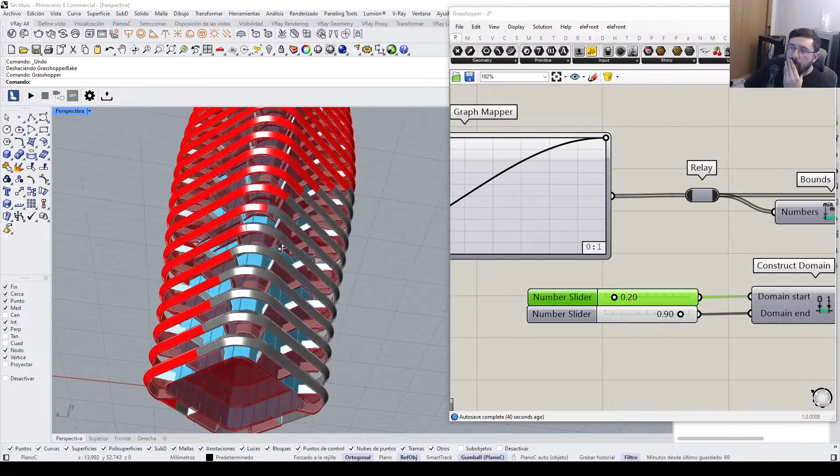Perhaps in this one here we can have some pergola or something, I don't know - these are just extra things we can keep adding. So I'm just going to quickly see what this looks like. Oh, okay, let me just change this layer's name to 6. Bake 1.

What would you do? That's a good question. What would you recommend? Five. And then 6.

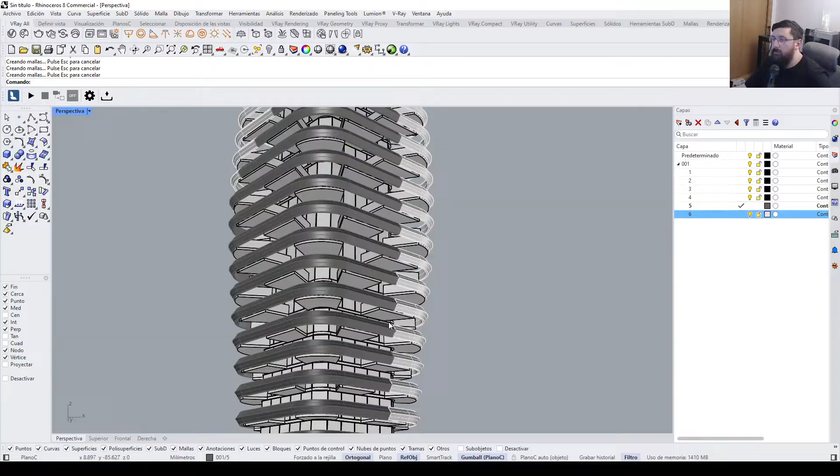It's interesting, and then this is the railing. And then I think this one was the interior glass. There you go - and we start getting this really interesting building.

Yeah, something like this, what do you think? And it's cool because I really enjoy this thing. The only thing is the starting height should be lower. That could be quickly changed with a quick adaptation over where - I mean, I could just move it all down.

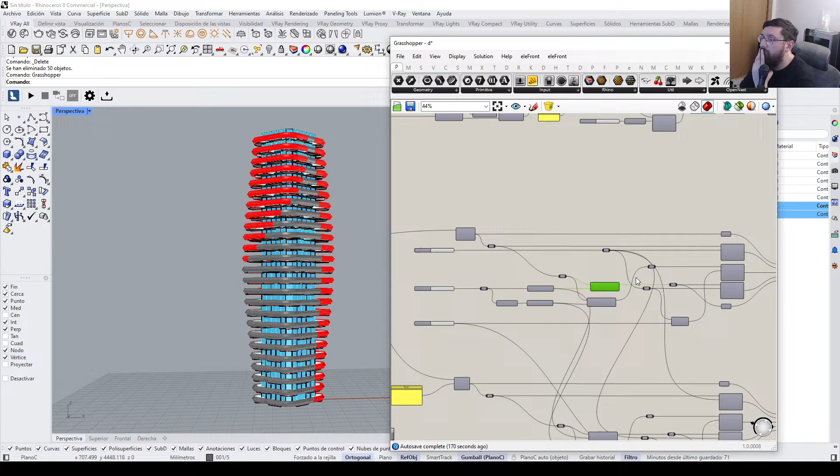Here, so that's 1.5. Height - yes, because I'm going upwards, isn't it? That means this shatter segment - I would have to probably move this downwards, so move Z by the slab thickness, which is somewhere I saw earlier. Where did I see it?

Where's the slab thickness? Here, 30 here - this is the value we're looking for. Bang. Shatter, I'm going to put this here. Here. And it should be negative. There we go, okay, so...

5, 6, and then we have that - we have that sort of design. Okay, slabs. I'm going to put it in like this color. Yeah, perhaps the slab divisions. Oh, this was not expected - it's only on that side. Well, can't always be perfect, right?

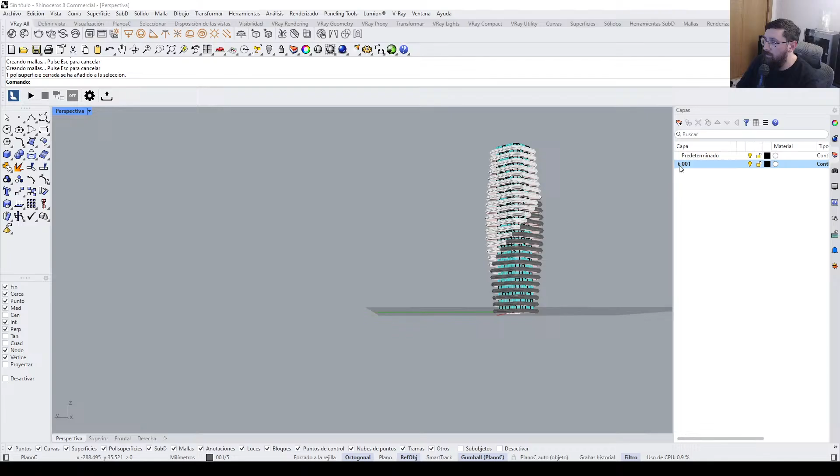Yeah, what would happen if the slab was divided into less parts? I think it might be a little bit nicer. Issue with these scripts is that to find what I was looking for - divisions, where's my divisions thing? Divisions, where are you? Divide curve. It's around here - scale, evaluate curve, graph mapper, bounds - is it this value here? X minus 1 divided - this is the number of floors.

If it were L-shaped, I'm not sure, definitely not sure. We could try it out though. I think it might be likely that there's going to be an error somewhere if you do an L shape. I'm pretty certain it's not going to work, and if it works, it's pure luck, because with scripts, it's not always a one shoe fits all.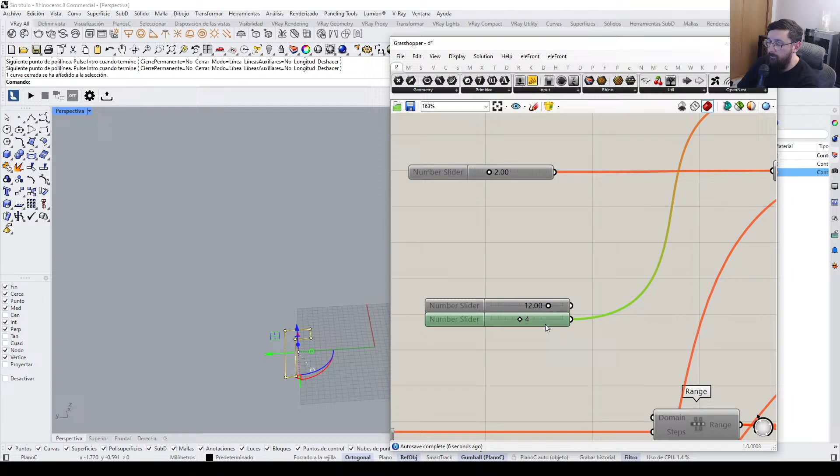You would have to change this part here. So here you would have to do a move Z using these values, and then instead of this polygon, you would use this here, right? Because you wouldn't use this polygon here. What's this value about? 4 sides. I mean, I could still use that.

Yeah, here you would use deconstruct brep. Deconstruct brep, list length. Vertices, instead of 4, you would use this here. I think that's what changes. We'll find out.

Oh, the scaling is going to be the issue, because we're scaling. Yeah, there's going to be some issues here. As for this, I'm not sure. Oh, okay, it still works. The issues come about over here. Yeah, you're going to get some issues because the approach wouldn't be to scale, because we're scaling from the geometric center.

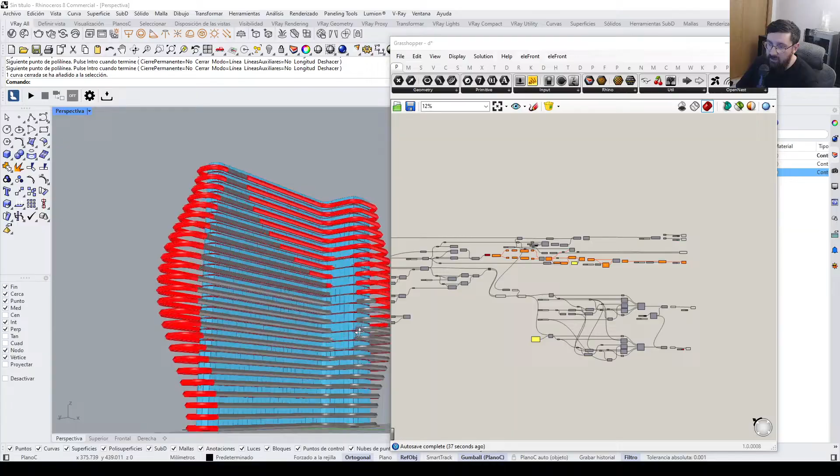Instead of scaling, you would have to use an offset option. But yeah, you can adapt the script, I think it's quite easy to do. I'm not sure if I'm explaining myself properly. You know, there's the part where we scale, we make it like a bump, right? Like the original design, it's not a continuous thickness, it gets bigger as it goes towards the center. But the logic on the previous one is that because it's symmetrical on all sides, we're scaling towards the center, whereas an L doesn't have its geometric center in a good spot, let's say.

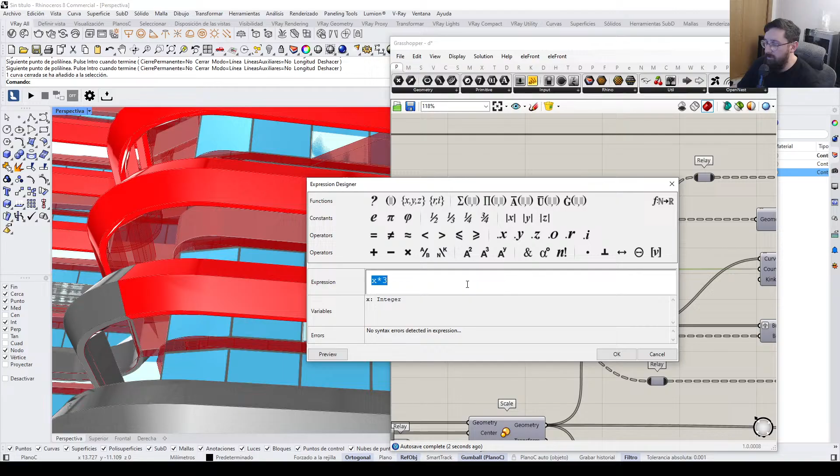The alternative here would be to scale by 1 always, and by scaling by 1 you're going to get that perfection. And then the divisions here, this is probably going to be what's most effective. So instead of dividing by 3, you would have to divide by length. There's just other parameters you have to take into account. I guess that's what the main difference would be. Evidently, the more divisions you have, the better it's going to be, but you can see it's kind of working. Yeah, I don't know, you would just adapt the script in another way, I guess is what I'm trying to say.

You can definitely try that, mate. You can have the script, I'll send it to you if you want it. Although it's quite bloody chaotic, ain't it?

Here, I was going to change this value over here. Instead of dividing by 3, I'm going to divide by 2. Oh, that's so much nicer. And you get the long... yeah, this makes me a lot happier.

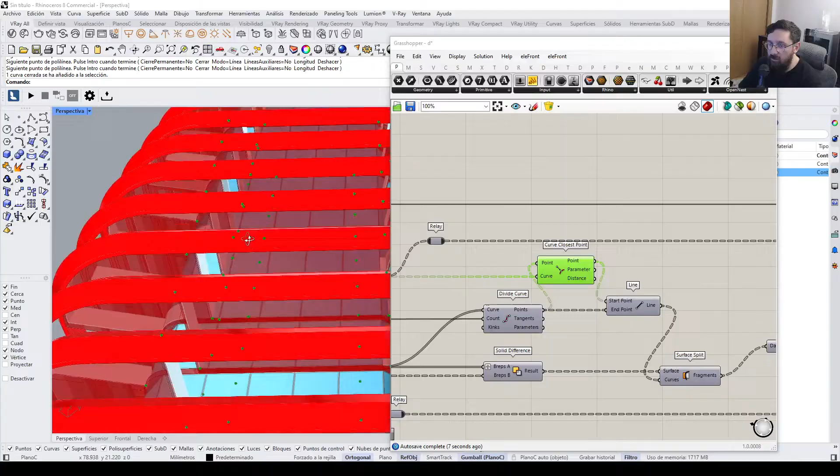And I'm thinking a different approach. Divide curves, center. I think curve closest point... no, this isn't it. Curve closest point. This is my curve, these are my points, and then this is going to be what's divided. Let me save. Instead of my center, this is going to be my new point. Yes, and it's just going to be a lot cleaner lines. It's going to be flat, nice and perpendicular. Yes, this is so much nicer.

You can see the balconies, they're now rectangular, or more rectangular should I say. Oh, okay, let me just quickly grab this. And this is going to be layer 4. Yeah, layer 4 is going to be my glass. Bake 4. This is going to be my layer 5, my layer 6. Save.

And it's a lot nicer. Oh, thank God. I'm thinking this should probably accompany this. So, one last tweak.

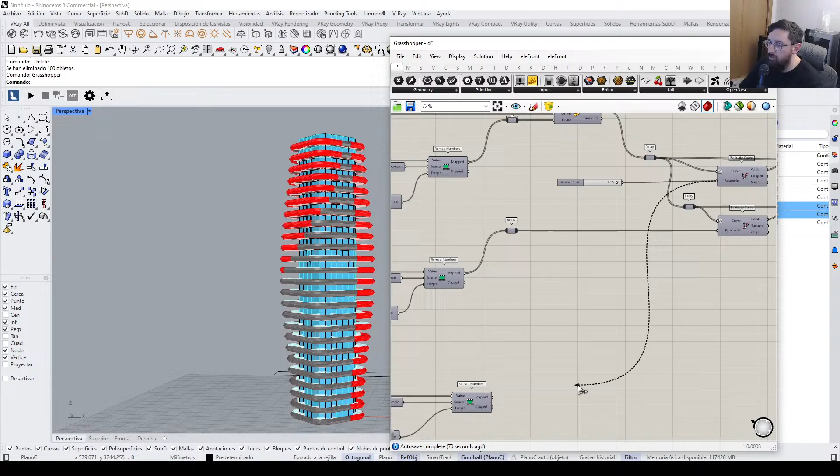Here. So instead of 0.95, I can go between 0.95 and 0.8, for example. Hopefully this makes sense, I'm not sure. Yes, it does, good. This 0.95 is too big, so I'm going to go for 8.5 and 0.5.

No. I need it to... oh, because this is my starting line. Okay. Yeah. No, I don't like it, don't like it. Okay, so this is my 0.2 starting from the same point. No, that's wrong, it should be 0 and then something like that. Where's my starting point? Here. There we go.

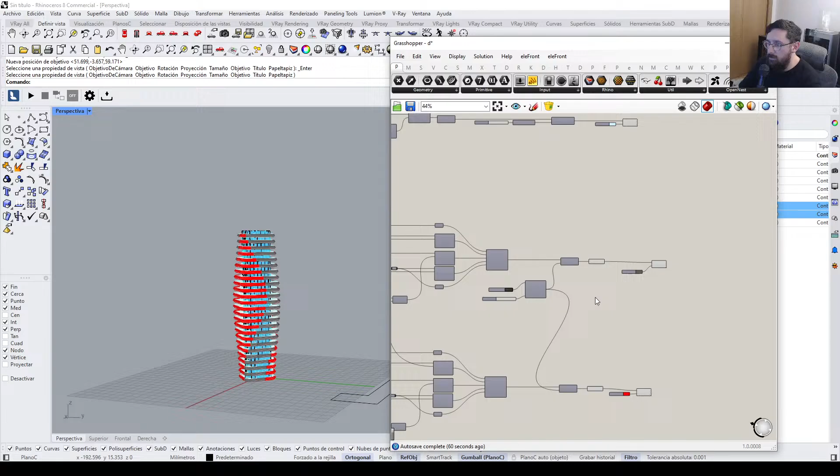Okay, good. And this is 5, 6. Okay, yeah, so something like that. Yeah, it's interesting. Oh, what happened here? Something happened here, what happened there? Oh, it's connected to something that's not meant to be connected to.

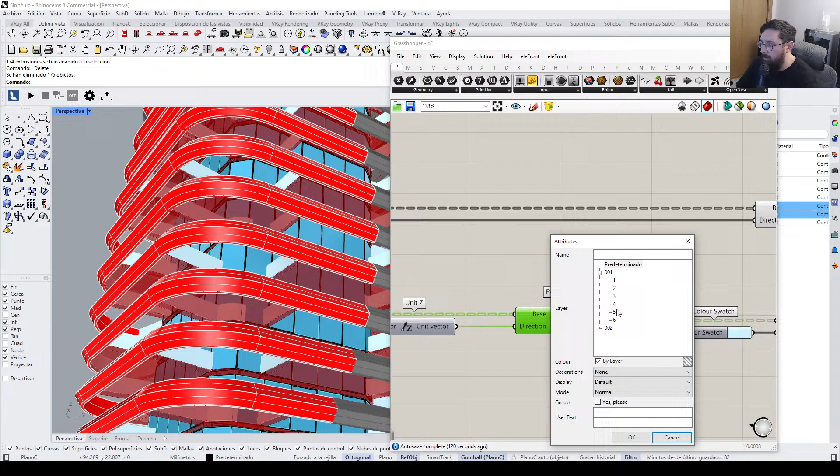Centroid. What on earth happened here? Color index. Something strange happened. What the hell? Oh, because I didn't update this. Okay, 4. This is 3, 3, there you go. Now it's updated.

Do you ever use a twisted box? Not really, I have done it once or twice.

Yeah, anyway, this is interesting. Whoa, what the hell happened here? Whoa, yay, my friend, what's happening here? What the fudge happened here?

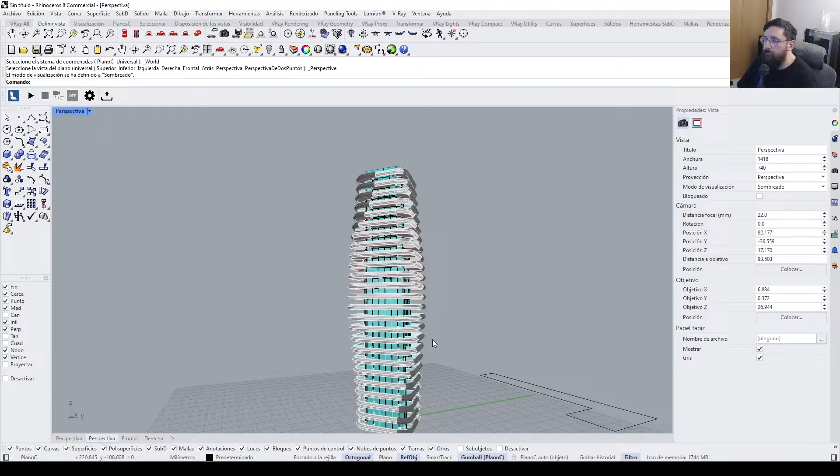There we go. So from street view, you would see something like this. Yeah, it's interesting, very interesting. At least for me it is, I don't know for you guys.

What would happen if the base were triangular? That's a good question, there might be some errors. With this sort of design, you can't really tell if it's always going to work.

So here on the polygon, what would happen if it were three? Is the question. It still bloody works. Good, thank God for that, eh?

Okay, what if I made it a pentagon? Of course it works, of course it bloody works. That's what we're saying. Good. Okay. Very good, I'm chuffed about that.

Anyway, I guess that's it for today. Hopefully that was an interesting script, or is an interesting script. Yeah, what do you guys think? Was it worth it?

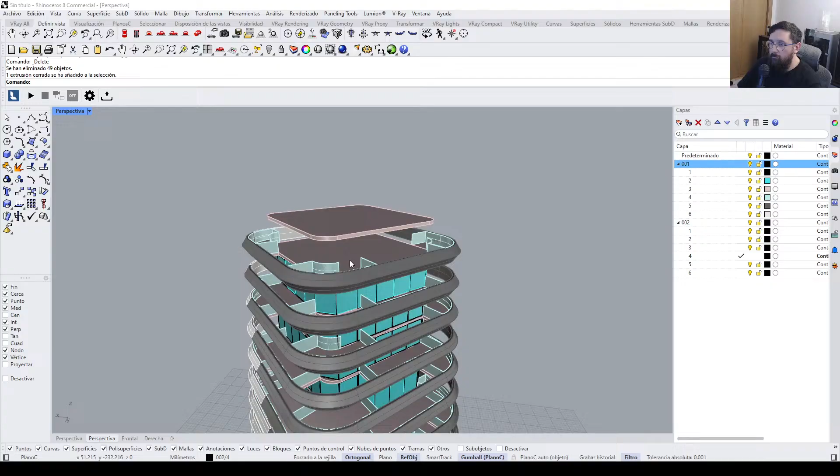Any shape with a center, star shape. Yeah, you could also do that, I guess. You would need it to be symmetrical, you would need a symmetrical design. So I guess what you're asking is, for example,

if I have something like this, right, and then I twist, in this case, 60. 60? From its center. Where's my center? Here. 60, for example. I guess this is what you're saying, right? And then it would be on the version we did below, where we have this.

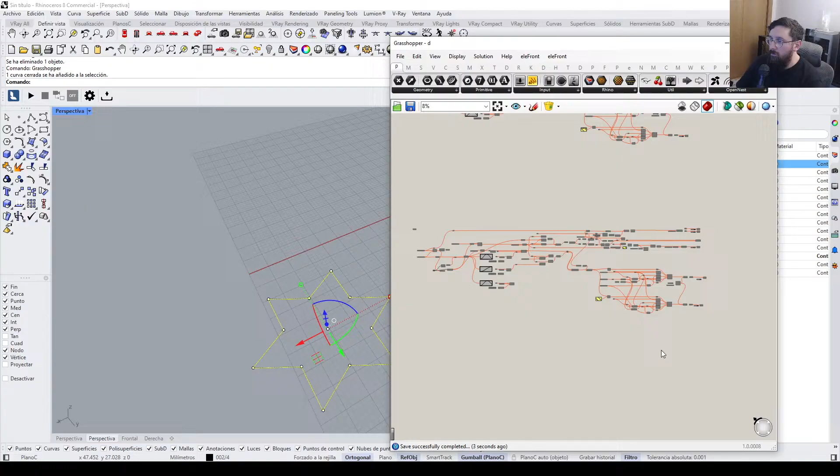Let me quickly save. If I turn all of this on, let it load. Let me just turn this off. I'm not sure if it's going to work, to be honest, but we can give it a shot. In theory, it should work. The thing is, you have a lot of divisions because you have more sides, so here instead of 5, I would say 2.

Yeah, there we go. So to answer your question, yes. I guess the condition would be it would have to be symmetrical.

Info came a bit late, oh man, yeah sorry about that. So to kind of summarize, this is a building we did where I work. I'm part of the design team. We did this project about 3 years ago, more or less.

It wasn't done parametrically, it was done using Rhino. The method we were doing in Rhino is the historial, there's an option where you can record history and then you can just adapt. It's similar to parametric design, but it's not as great.

And then we did this kind of zigzag effect on the balconies, not for an aesthetic reason only, but for a constructive calculation. So in Spain, we have that thing where if you build a balcony on top of another one, like if I were to build another one straight above, it counts as constructed surface, and you're very limited on constructed surface.

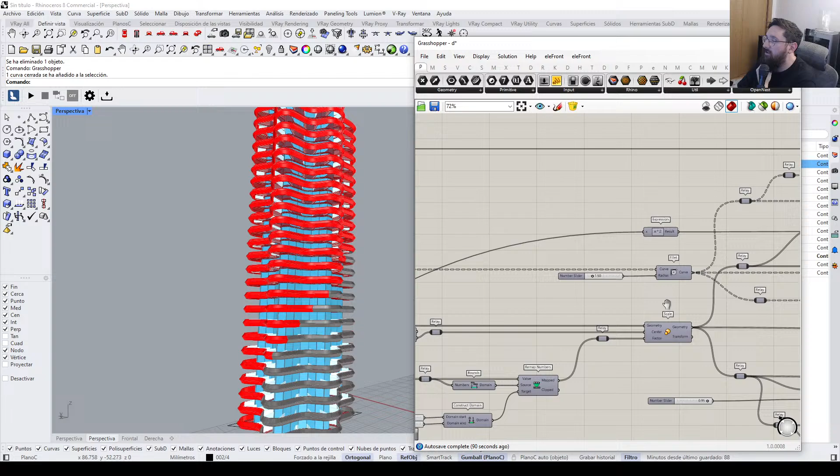Let me just quickly change this. Yeah, it's interesting. I'm not sure I know what you mean.

Yeah, sorry, so the balconies don't compute if you do it this way. If you build it one on top of the other, it does compute. So yeah, it's a little design trick, which turns out really well.

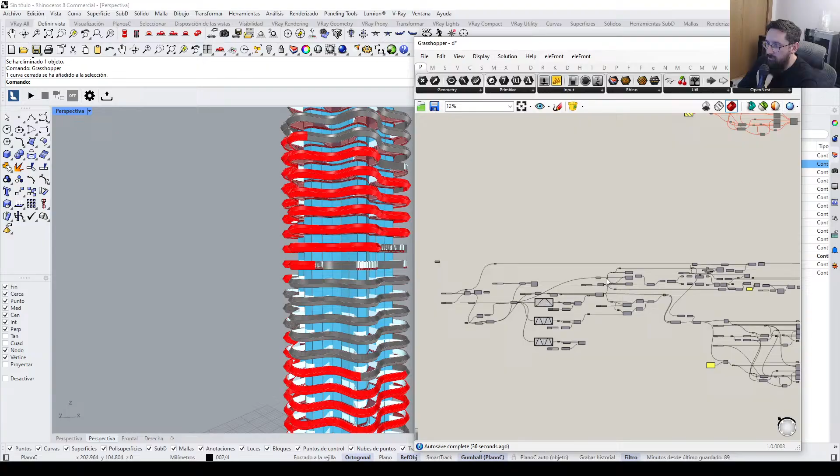To be honest, like in person, it's beautiful. It's a really beautiful building.